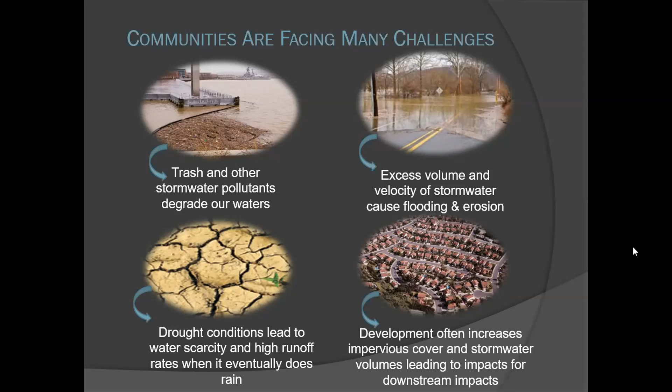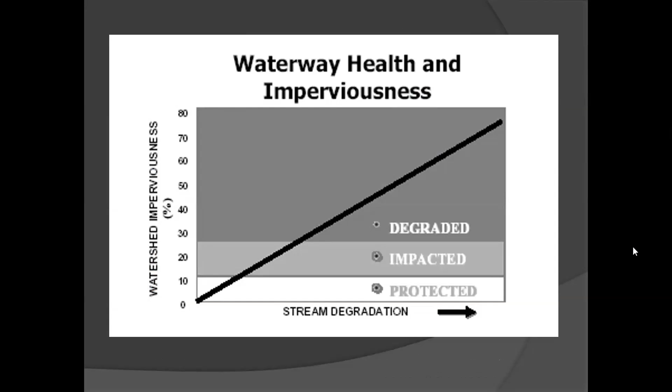Communities are facing a lot of different challenges dealing with stormwater: trash in the stormwater, excess volume and velocity that causes flooding and erosion, drought conditions that create high runoff rates when it eventually rains, and development that tends to increase impervious cover and stormwater volumes. This slide basically shows a graph that the more impervious surface - concrete and asphalt - you have, the more degraded a watershed becomes. Once you get up past about 25%, it starts becoming fairly degraded.

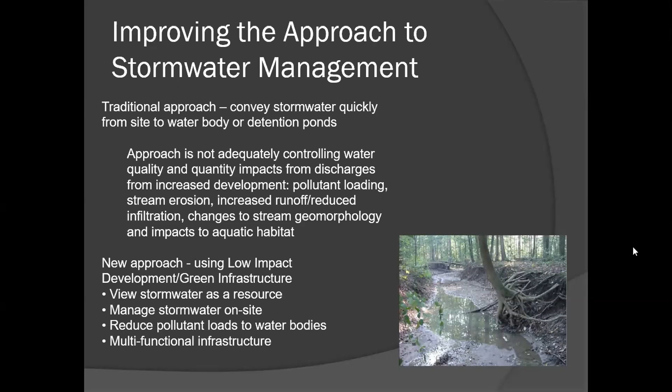Improving the approach to managing stormwater is really important. Typical stormwater management is designed to move stormwater quickly off-site, sort of treating it as a waste product. But trying to rethink that by using low-impact development or green infrastructure views stormwater as a resource - it helps manage stormwater on-site, reduces pollutant loads, and also creates multifunctional infrastructure.

Basically, green infrastructure are systems and practices that mimic natural processes to infiltrate, evapotranspirate, or reuse stormwater. It can be used at a lot of different landscape scales.

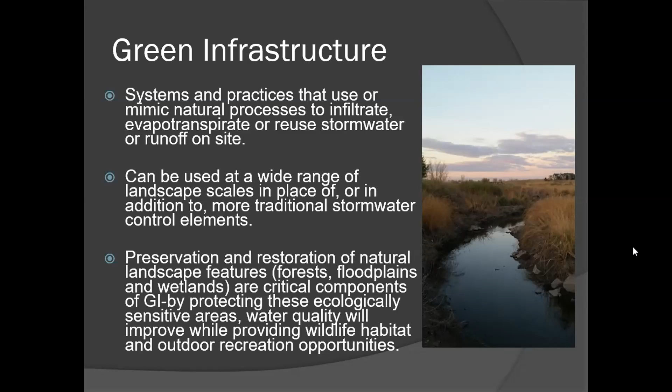Low impact development and green infrastructure get used a little bit interchangeably. There are some slight differences, but basically it's trying to re-envision land use planning and use a pre-development hydrologic regime so that we have more natural functions. It's sustainable, can be added to new developments and redevelopments, and tends to be less expensive when added on the front end rather than the back end.

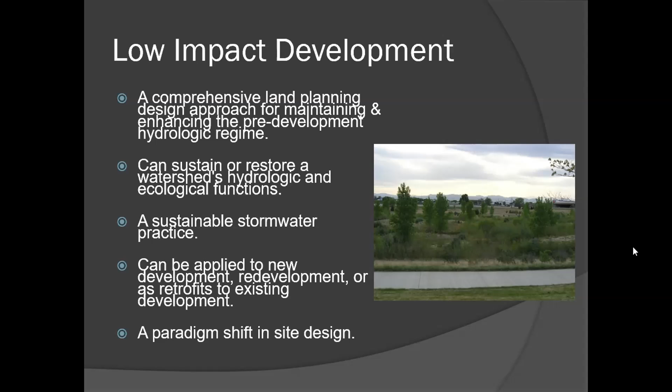Green infrastructure will have a bigger impact when it's holistically integrated with other infrastructure, and multi-benefit infrastructure is more cost effective. Since governments never have enough money, if you can create that multifunctional infrastructure, it's really helpful.

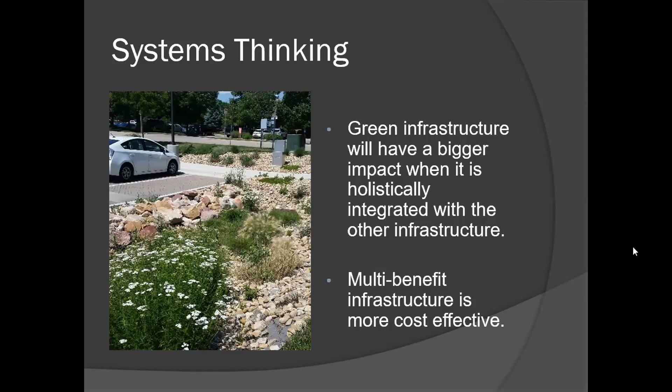Green infrastructure helps build resiliency, dealing with things around flooding, climate change, and urban heat island effect. It has a big impact on that.

Basically, green infrastructure helps slow down stormwater, spread it out, and soak it in. It can be used in a lot of different places: parks and open space, urban forestry, parking lot landscaping requirements, climate adaptation strategies, resilience strategies, and flood restoration.

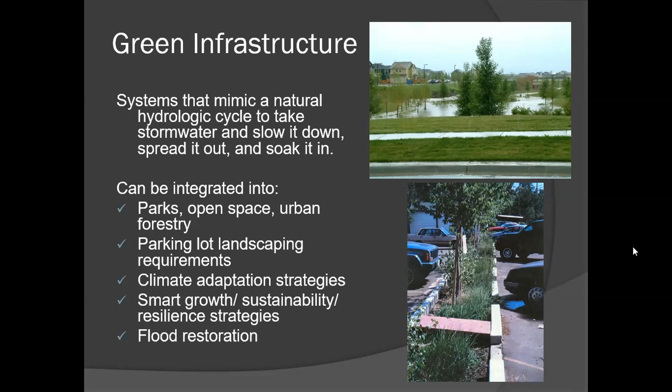The top photo is Greenway Park during a flood event in the Central Park neighborhood, showing how it functions the way it's supposed to - it doesn't flood any houses. The lower photo is a parking lot in the city of Boulder, and you can see there's a bunch of cuts that drain water from the parking lot into the parking lot landscaping.

There are lots of different types of green infrastructure, and this is not a comprehensive list of all the terms - there's a lot of different terms used. Green roofs, planter boxes, rain gardens, bioswales, different types of porous pavements. There's rainwater harvesting, cisterns, and rain barrels, and then more natural types of green infrastructure such as wetlands and riparian areas.

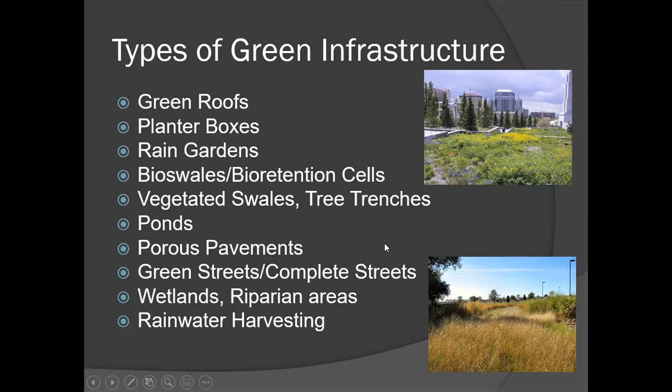Green infrastructure is really important to manage stormwater, also for climate adaptation, urban heat island reduction, biodiversity. It actually improves air quality, helps clean water, helps create healthy soils. It's great for recreation and also for quality of life.

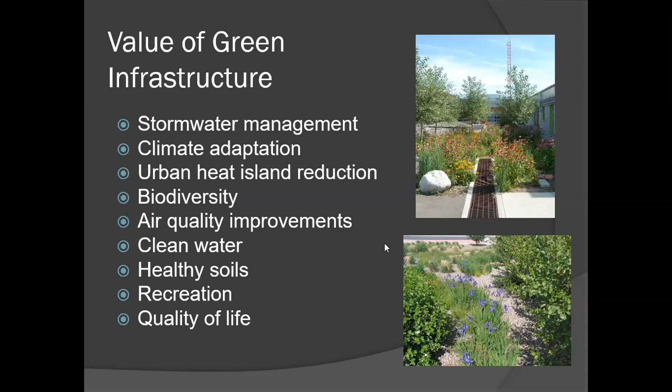There are a lot of additional benefits from green infrastructure: reduced stormwater runoff, groundwater recharge, pollutant reductions. We don't have any sewer overflows in the state of Colorado, but in other parts of the country, that's important.

Carbon sequestration, reduced energy, wildlife habitat, increased land values. Permeable pavements can actually have less splash and spray, ponding, noise, and pollutants coming off of them. If you look at long-term costs, green infrastructure can actually be less expensive than gray infrastructure. It's a lot prettier to look at, and it makes communities more resilient.

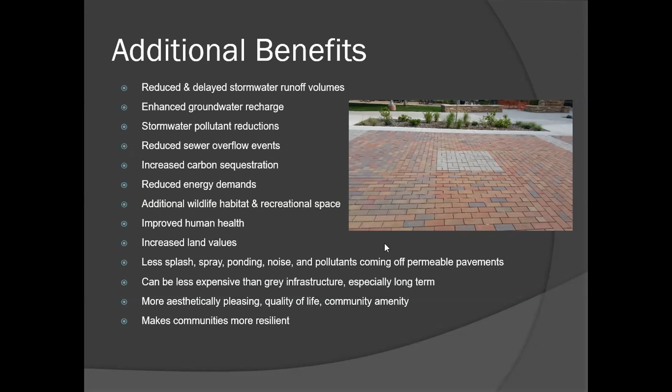There are a lot of different ways you can incorporate green infrastructure depending on planning or other things in a town. I won't read all of these, but looking at ordinances and incentives, building codes, shared parking, promoting tree canopy, and riparian setbacks can be really important ways to help incorporate green infrastructure. The photo you see there is actually Central Park in Denver, which used to be under some taxiways. That's 29th Avenue, and now we've got green infrastructure and a running path there.

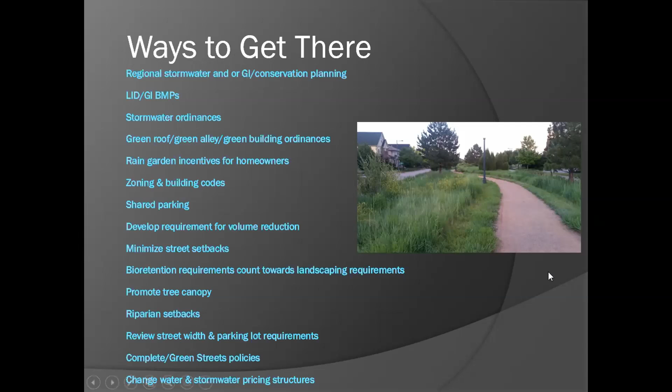One of the biggest considerations for green infrastructure is operations and maintenance. This tends to concern a lot of public works departments because it's a different kind of green infrastructure than what they've typically been used to doing. Fort Collins is actually very good at this, with a really good low impact development ordinance. But green infrastructure needs to be monitored for infiltration and drainage, needs to be pruned and mowed. You have to deal with mulch, watering and fertilizing it, replacing dead plants, looking at inlets and outlets and under-drains if you have those. All of that has to be done at different frequencies.

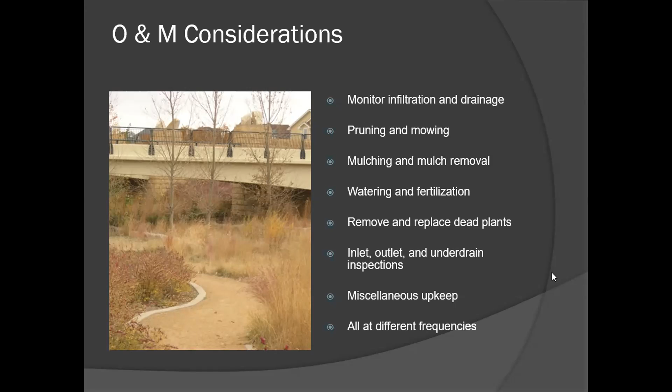The photo you see there is Greenway Park. I showed a photo of that earlier during a flood event. This is actually in the fall, and it's a good demonstration of how it doesn't need irrigation now, but it did when it first started for about the first three years in order to get that green infrastructure established.

Laura's going to have a copy of my slides if folks want access to any of this. We have a semi-arid green infrastructure webpage. If you Google EPA green infrastructure, it'll pull up the headquarters website, and we're a subset off of that landing page.

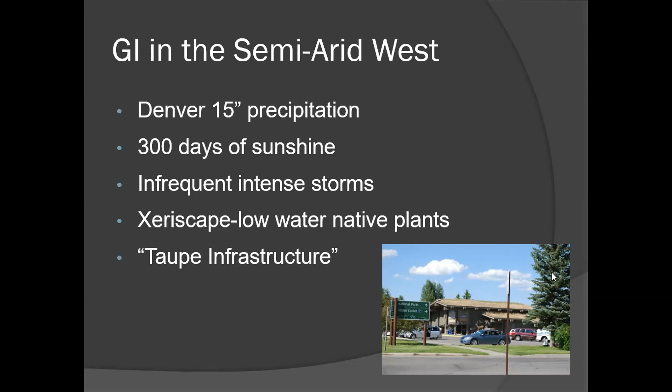What's different about the West, as I mentioned earlier, is we don't have hardly any combined sewer overflows, so we don't have enforcement actions that can compel municipalities to do green infrastructure. In our region, green infrastructure is more of a voluntary approach, although it is part of some municipalities' municipal separate storm sewer permits if they have one.

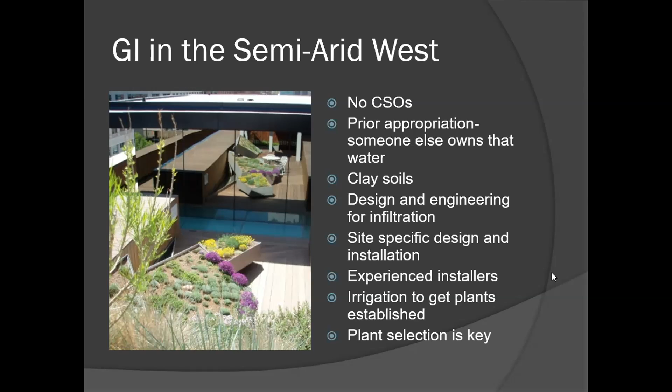Another thing that's different is prior appropriation, Western water law, where someone else owns that water. We tend to have a lot of clay soils, so it's really important to design and engineer for infiltration. Site-specific design and installation is important, having experienced installers, irrigation to get plants established, and choosing the right plants to begin with. The photo you see there is the former Museum of Contemporary Art in Denver, which had a green roof.

As I mentioned, plant selection is really key. Natives are preferred. Kentucky bluegrass is not great for semi-arid climates due to the water use, the shallow roots, and the amount of herbicides and pesticides that are typically used. If you're doing green infrastructure along roadways, having salt-tolerant plants can be really important. Conifers tend to be less salt-tolerant.

A few barriers in our region: there's some perceptions about design, construction, and maintenance costs. There's a lot of new data out there that looks at that. A lot of mixed messages and lack of connections from different government agencies and departments. Misperception around economics. Not having the kind of integration into regional and site planning. Lack of trust in anything new. And then the irrigation needs.

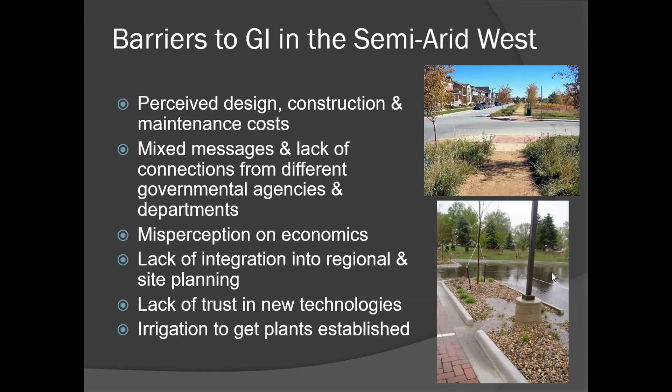The photo at the top is again in Central Park in Denver, that's the median along 29th Avenue. And at the bottom, that's actually at Odell Brewery. This one doesn't have the really established plants. The last time I was up there, it was not raining and there were so many cars in the parking lot, I couldn't get a more updated photo, but it shows you basically how the permeable pavements can direct any excess water into some areas where you have plants.

Also in Denver, the photo on the left is actually a permeable pavement green alley behind a food hall. And the photo on the right is a planter box, and you can also see that some of the sidewalk rainwater that comes off of that is directed into that planter box.

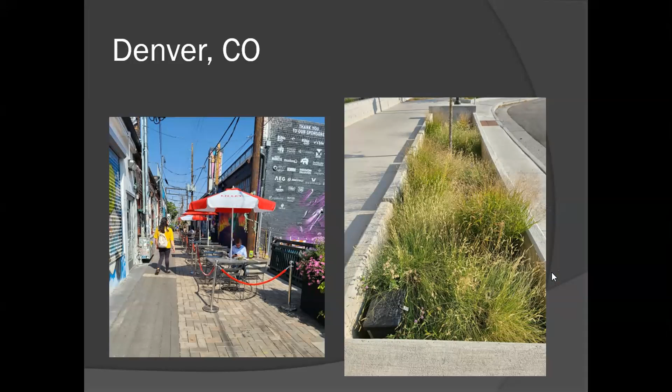This is Metropolitan State University in Denver and some of their green infrastructure. The top photo is kind of a gathering place, amphitheater sort of area with a lot of green infrastructure around it. On the lower right, you can see rainwater is directed from the street off into a rock area and then down into some plant material and a swale.

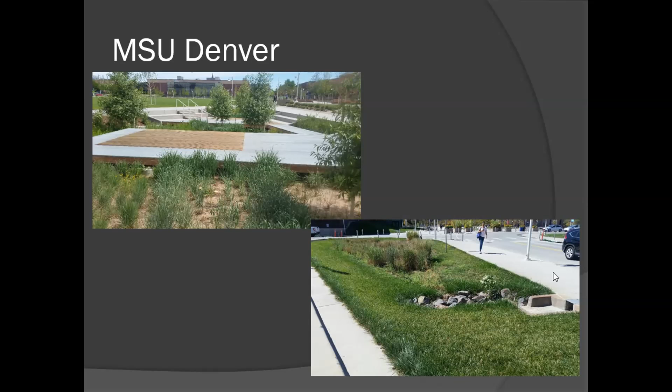This is the University of Wyoming in Laramie, and this is a green roof. It's quite a bit more established than this photo shows. This was fairly early after it was planted.

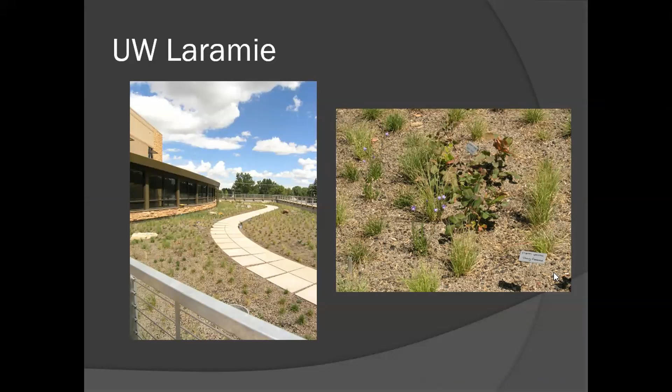This is some photos of the University of Utah Law School in Salt Lake City. They've got a lot of planter boxes, it's a very green building overall. They've got a lot of solar panels, and then they've also got some rain gardens and some other things that I don't have photos of, but they did a lot of sustainable redevelopment there.

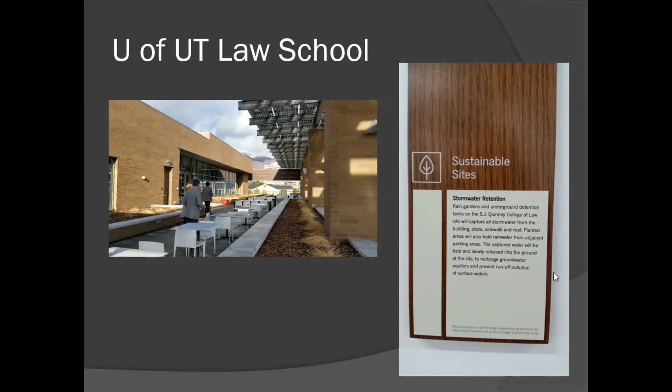And the next photos I'm going to show you are about some community-driven design projects that EPA has been involved in.

As I mentioned, we did some design charrettes. This redevelopment was actually an EPA Smart Growth Achievement Award. There's a great video, and there's some information in a report that sort of summarizes what happened in those design charrettes. It's actually on Denver Housing Authority's website.

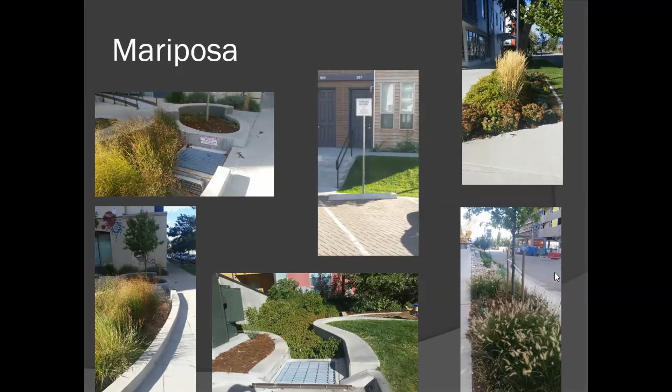Here's some more photos of the green infrastructure that ended up being installed in all of the phases that were put in. So you can see some porous landscape detention, some permeable pavements, and some nice planter boxes.

A few lessons learned from the design charrettes: taking a holistic approach always works better. They really looked beyond their site boundaries into how stormwater was managed on adjacent streets and other areas, trying to identify all the stakeholders up front, looking at priorities and trade-offs, defining clear goals and metrics. Collaborating with all the different players was really helpful to have that upfront collaboration to see what was possible.

Innovative solutions may require a little bit of research and testing. Environmental conditions, any site contamination, brownfields issues may affect the types of green infrastructure that may be chosen. And having cost estimates up front really helps you implement it later.

This is Westerly Creek in New Freedom Park. It's a different part of Westerly Creek, actually in between Central Park, formerly Stapleton, and the Lowry redevelopment. It's an area with a lot of affordable housing. The creek actually goes underground into the city of Aurora. It was rather unsafe with a lot of riprap, and a lot of kids played in here. On top you can see the before pictures, then the sketch of how it was re-envisioned, and on the bottom you can see how it looks currently, with really nice vegetation and a low water crossing.

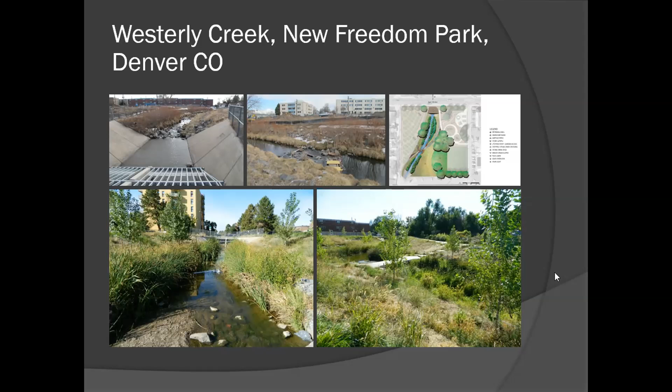This was basically a park that Trust for Public Land was working with the city of Denver on, a property that the city owned, working with the affordable housing providers because there weren't parks in that area. They redesigned the park. However, they didn't have money to do anything about the creek, and that's where EPA's funding came in.

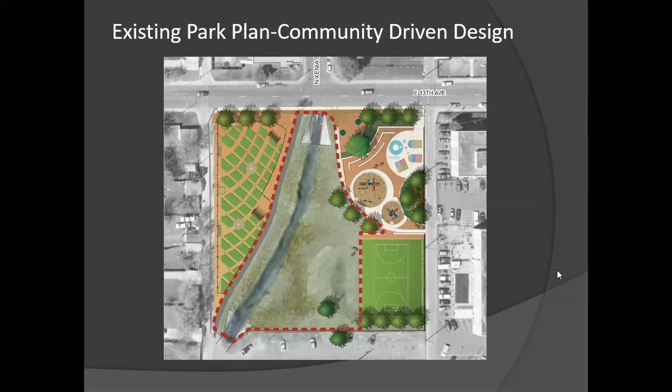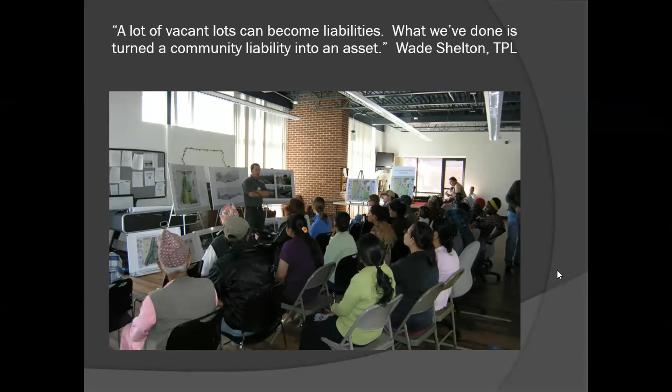And it ends up being a very well-used park. It's also got an urban garden next to it, and created a great space for everybody there. Kids were really important to the event.

This was some work that we worked with the Greenway Foundation on the River Vision implementation plan. They basically did some Greenway master plans and then created a River Vision implementation plan, and 3 of the projects we ended up working with them and the public on, and the city of Denver. We also worked with the city of Denver on a corridor-wide planning project looking at brownfield sites in 5 catalytic properties along the South Platte River.

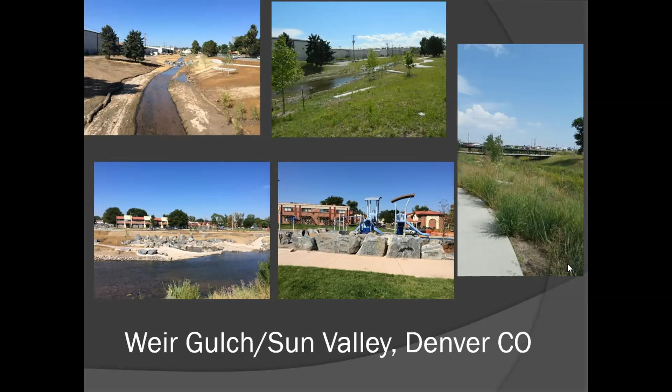Here's one of the properties. This is Weir Gulch at Sun Valley. This is Denver Housing Authority's current redevelopment project that came after the Mariposa project. Weir Gulch was originally a concrete lined trapezoidal channel. You can see the photo on the left of when they ripped out the concrete, and the next photo near the top of what it looked like after some of the vegetation came in. There were some drop structures put in to drop out sediment before it goes into the South Platte River. And it was very cool—as soon as they ripped out the concrete, we started getting wildlife in there: a turtle, some crawdads, and deer coming down that hadn't come down there before.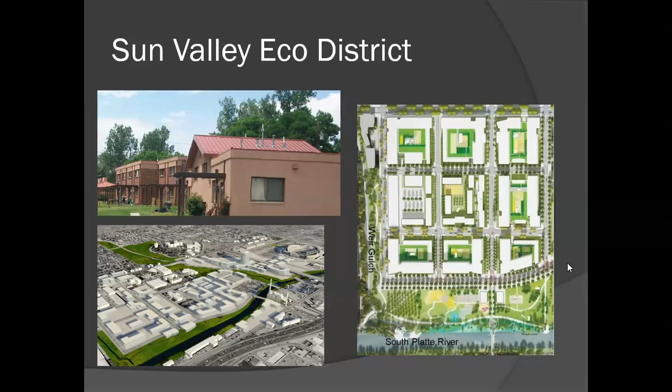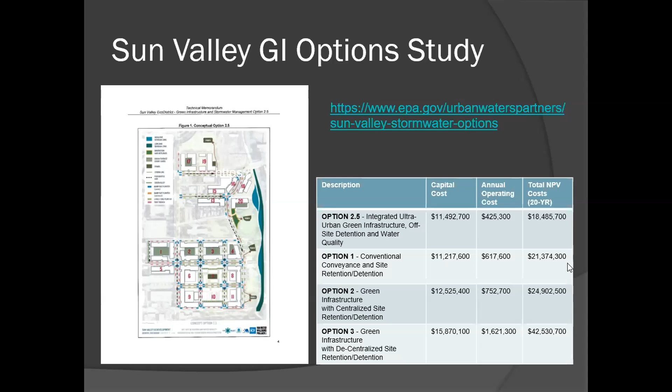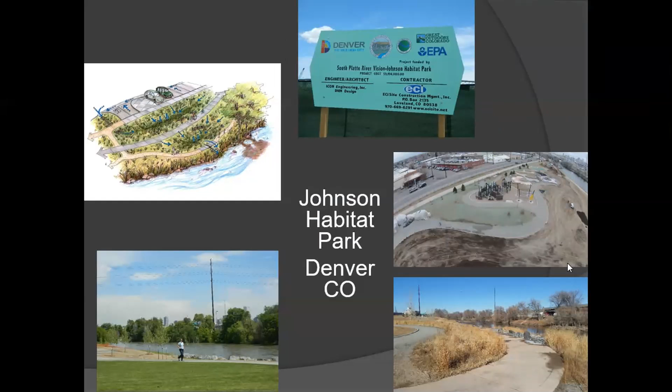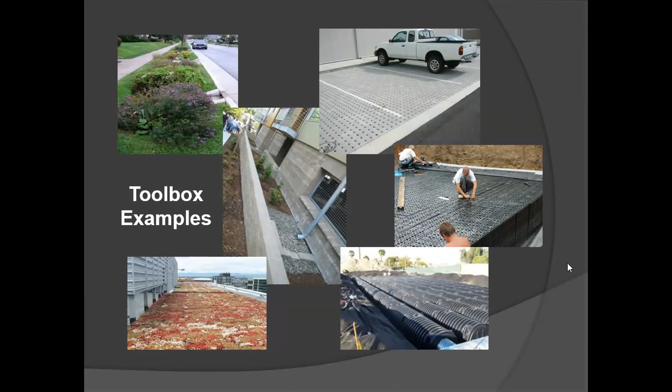This was a project with the Urban Land Conservancy at the 38th and Blake Transit-Oriented Development Light Rail Station, looking at potential green infrastructure on that site. Looking at different examples, they were able to demonstrate that if they wanted to build it, they could manage all of the stormwater from a 100-year storm event on site.

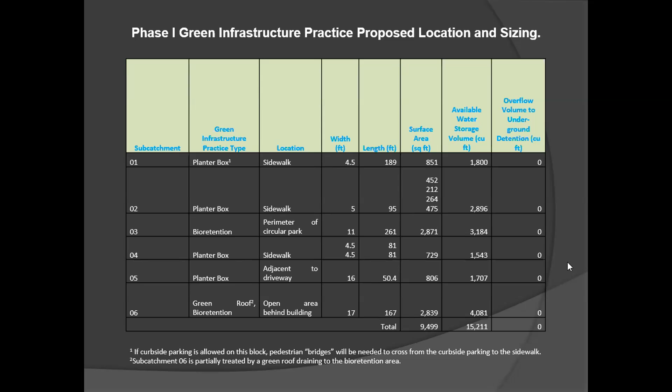This just shows you the engineering that goes into figuring out how much stormwater you need to infiltrate. It also shows different types of green infrastructure practices and how much water storage volume they can get from that.

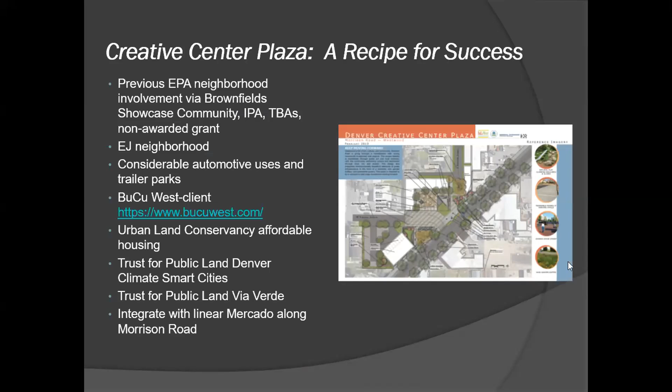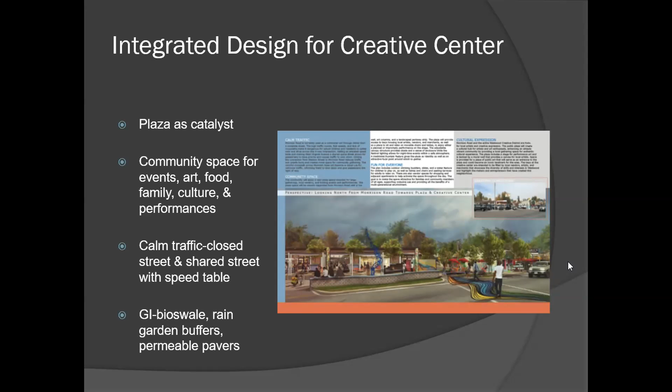The design had a plaza as a catalyst for the community, creating a community space. They also did some traffic calming, closing down one street and creating a shared street in the design. They're still working on moving this forward. It had a bioswale and rain garden buffers, and some permeable pavers as part of the design.

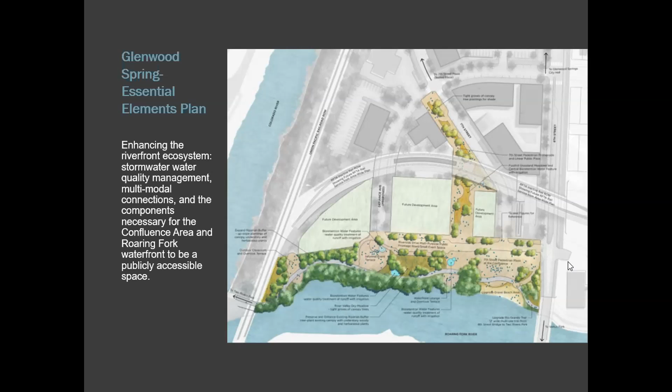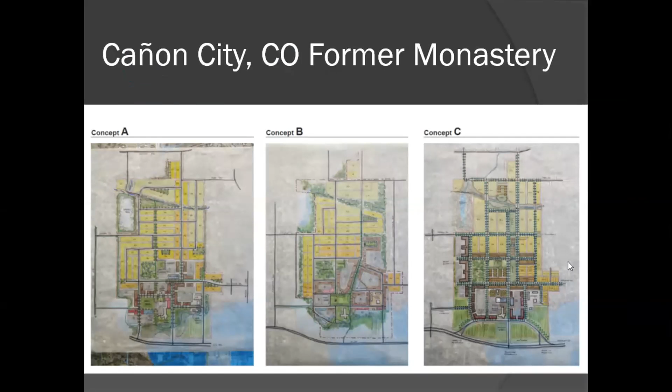This is a project in Cañon City, a former monastery. This shows you the three concepts that were part of the design charrette with the public. This was our first virtual event because of COVID. We went through three possible designs, and the community stakeholders picked out the pieces that they liked best out of each design, and then we came up with a final design, trying to keep all of the great aspects of these historic buildings that were the monastery.

There's a nearby winery, and we're trying to expand access for that, create lots of different housing types, and manage stormwater from the site by expanding an existing stormwater retention area and turning it into an open space, also using some wildflowers to create green infrastructure near the winery.

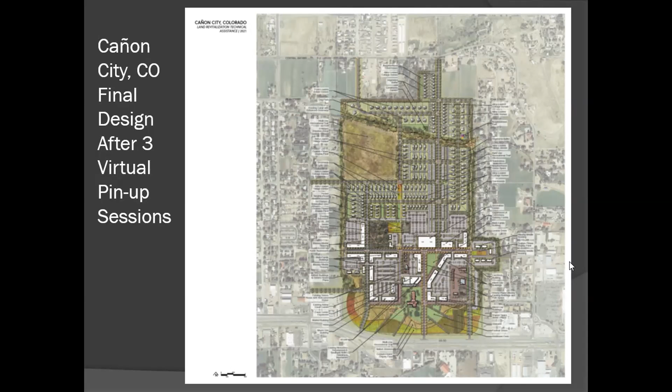Big takeaways from community-driven design: the community lives there, they come up with great ideas, and they know what they want. It's helpful having their input so that you can get a design you can later go look for funding, and have the support of the community and the folks in the municipality.

Maintenance is important to figure out and design that in on the front end. Conceptual designs help get the community excited to go look for funding. My experience is it's really great to have a really good team of landscape architects and engineers, and having them both involved on the front end.

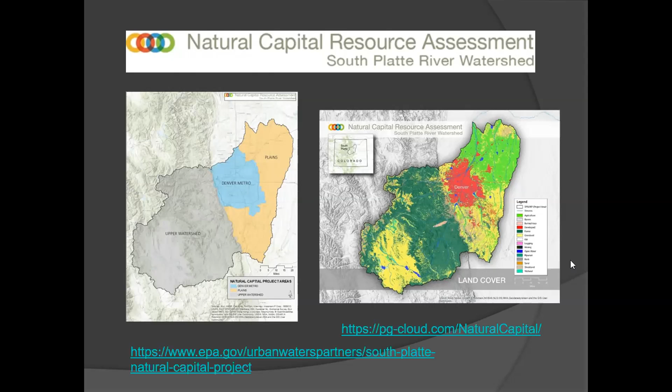This is just a project I thought I'd mention to all of you. It's part of our South Platte River Urban Waters Partnership, called our Natural Capital Resource Assessment. This was done in the South Platte watershed. It looks at green infrastructure over the whole watershed, dividing it into the upper watershed, the Denver metro area, and the plains, mapping all of the green infrastructure and putting an ecosystem services value on it. This helps you decide where the best places are to install green infrastructure and where you can get the biggest bang for your buck.

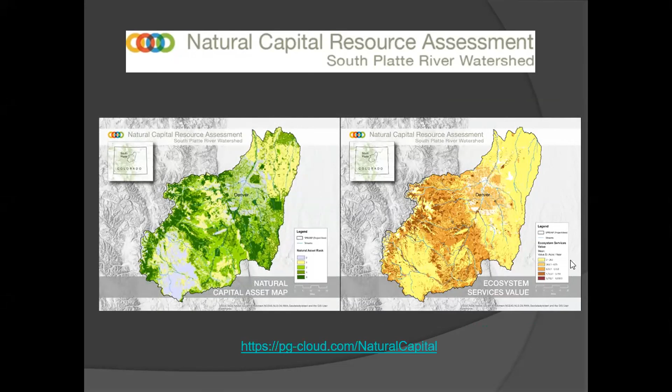We also have a teacher and user guide posted on our South Platte River Urban Waters Partnership webpage. We're in the process, and I'm hoping it will be done by the end of the year, of pulling in a lot more data. Right now the data we have is from 2009 through 2015 for some select pollutants, but we're going to be pulling in more current data, and the tool will be dynamic rather than static.

And that's pretty much all I have right now. I really appreciate all of your attention, and I am available if anybody has any questions.